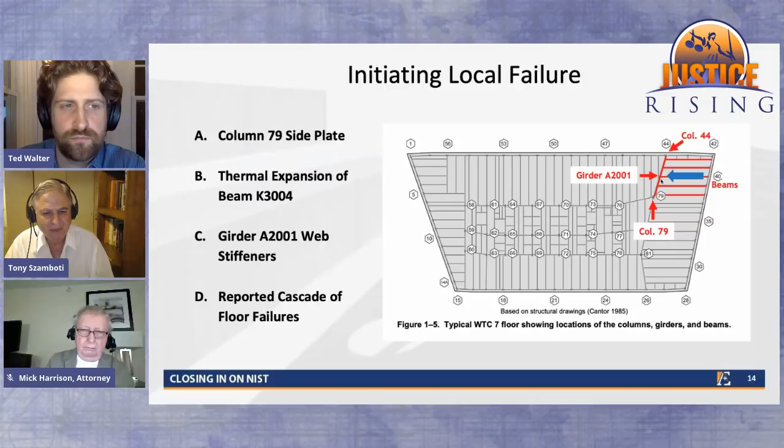So I guess we could move on from there, Ted, because we're going to explain. Okay. We're going to explain.

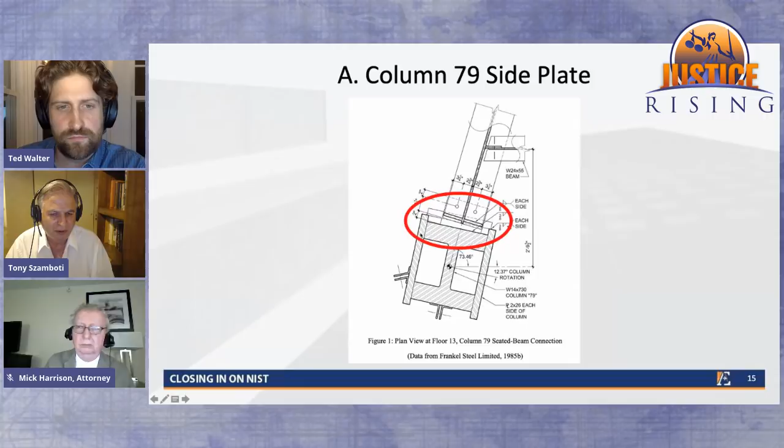This is a top view. You're seeing a section of column 79, with the hash marks, and you're looking at the top of the girder. And the column is interesting. It's what they call a built-up column. It's a very heavy I section, with 5-inch flanges on a 3-inch web, and then it has 2-inch thick by 26-inch side plates welded to it, so it's built up. And those side plates protrude, nominally, 1.79 inches past the face of the I section. So you see that protrusion there.

And the girder is oriented so that its western corner, that corner there, Ted, is only about 1/8 inch clear of the side plate to the left.

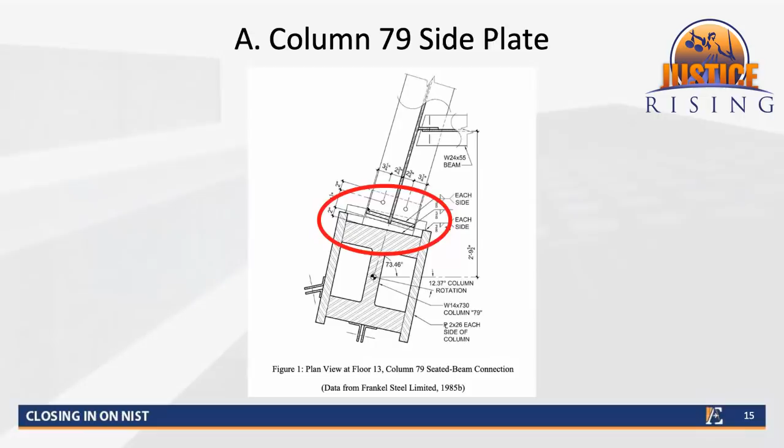Now, that's at room temperature. As soon as this thing heats up at just 200 degrees centigrade, it's a 45-foot long beam. It's going to expand about 1.25 inches. That's 5/8 of an inch. So that puts it 1/2 inch inside the side plate. You can see this sort of model, the side plates here.

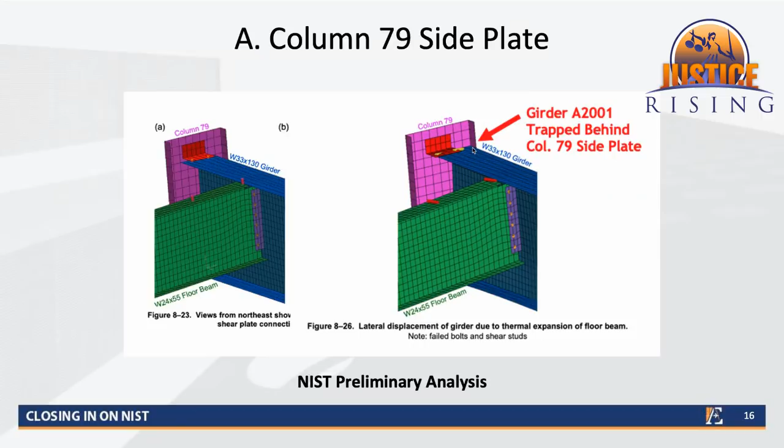And in their analysis, it actually got stuck in their preliminary analysis. You see it. They don't have it going past that side plate that you see on the upper left, on the right side view. In the left side view, it's at nominal. It hasn't expanded yet. In the right side view, it's expanded, and it's stuck behind that side plate. And that side plate is 2 inches thick, and it's welded along the whole column. There's not a chance that the beam would buckle before that side plate ever ripped off of that column. So they don't address this, even though they show a figure like that.

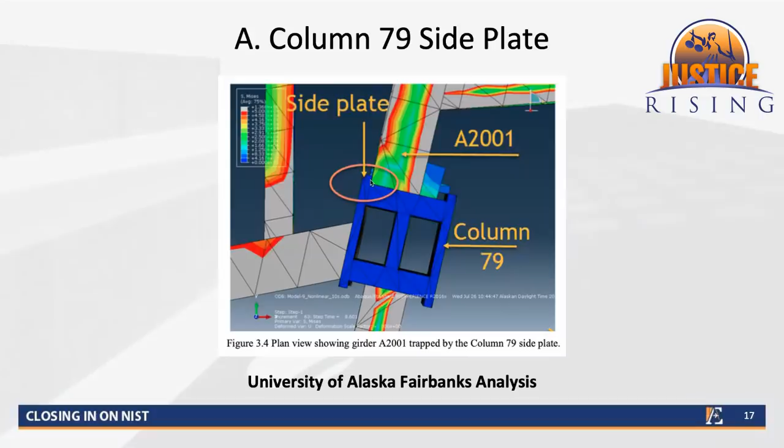And this is what the University of Alaska at Fairbanks did in their analysis. They show here that the girder certainly, it's heated. This is a stress analysis with heating the beams in the girder, and the column stays a lot cooler. And anyway, you see the girder gets trapped. It goes up against the flange, the face of the column, and it gets caught behind that side plate. That's exactly what would happen. So there's not a chance that that girder could be pushed off its seat.

And what this says here is, I'm going to just read the highlighted part. The full-scale model had detailed connection models that are consistent with the fabrication shop drawings as shown in figures 8.21 and 11.15 of the World Trade Center 7 report. The girder A2001 to column 79 connection locates the bolts on a seated connection attached to the exterior edges of the column 79 side plates. with the girder axis at a slight angle to column 79.

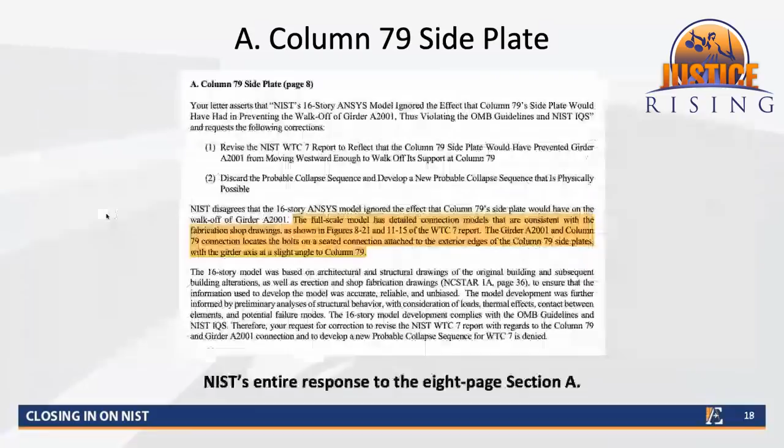They're just telling you what the connection is. They're not giving any answer to the question on why they did not see that the girder would be stopped by the side plate, and when it's obvious in their figure.

So on the left is NIST figure 8.21, and you can see the side plates don't protrude very much. In the left-hand figure, the right side of that, you see a top-down view. And I showed you a realistic to-scale drawing at first, and they stick out 2 inches. They're 26-inch long side plates. It looks here like they have it sticking out a 1/2 inch, and they have the girder sitting back a significantly greater distance, at least when you just view it scale-wise, than the actual distance the girder is from the column itself.

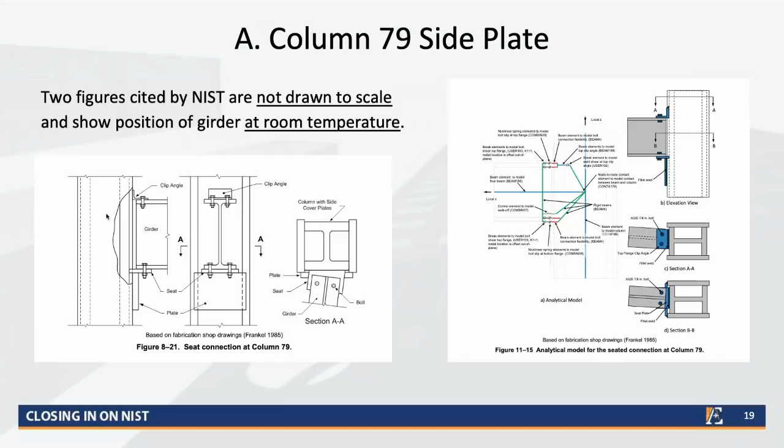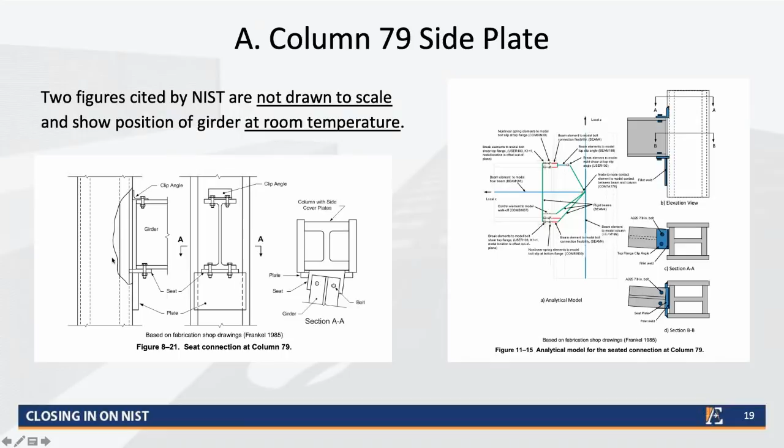So Ted, on the right side, I don't know what exactly that was there, but it's similar. It's similar. I think it's showing it more from a plan view. It's also showing it from a plan view, and what that's showing is the top and bottom clips. Top and bottom, yeah. The bottom bolts in the top clip.

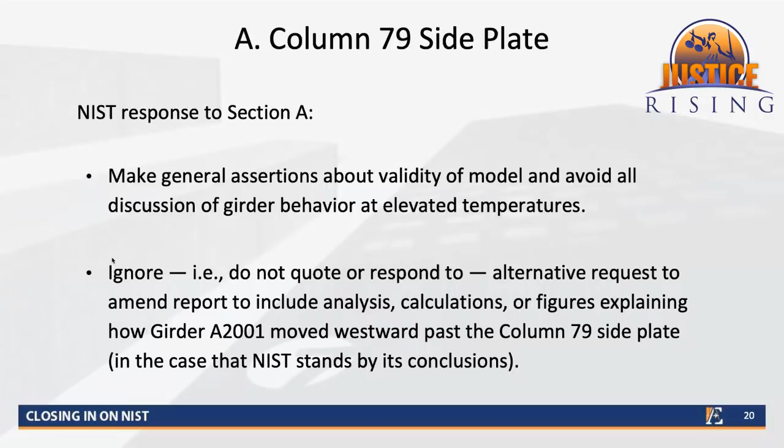Yeah. So section A of the request for correction was about the side plate issue, and we're saying that all this is doing is making general assertions about the validity of their model, and they don't discuss the behavior of the girder at elevated temperatures. It's going to expand. They said it was at 500 degrees. And bear in mind that there's proof that girder had to get hot.

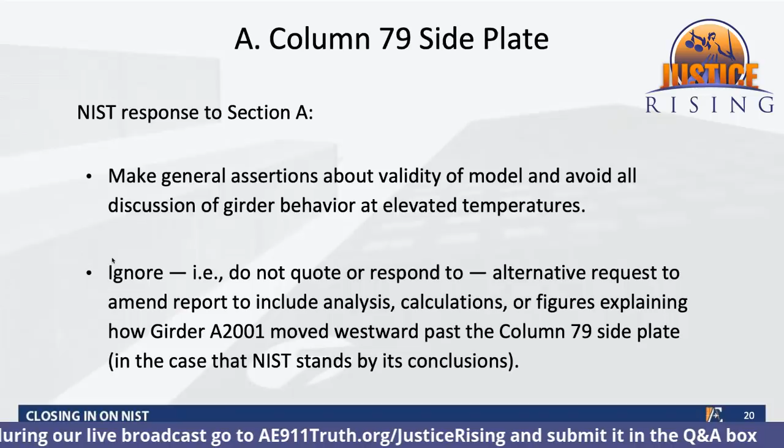You can't have beams which are connected to the girder and in very close proximity to it getting hot, so they expand and push the girder without the girder getting hot. It's right next to it. You can see they're connected. So if the beams get hot, the girder's got to get hot. If the girder gets hot, it's going to push itself towards the columns, and it's going to be up against the flange of the column at 500 degrees. And it can't get around that 2-inch side protrusion of the side plate.

One thing I want to highlight, which is kind of stated in the second bullet point there, Tony, is that throughout the request, what we also said was, okay, if you maintain your findings, if you maintain your position, then you need to include more information, analysis, calculations, or figures that are actually explaining how the girder could move past the side plate. Because in their preliminary analysis, as we showed, the girder gets trapped behind the side plate, but in the larger scale analysis, somehow the girder moves past the side plate. Well, they don't even talk about it. No, exactly.

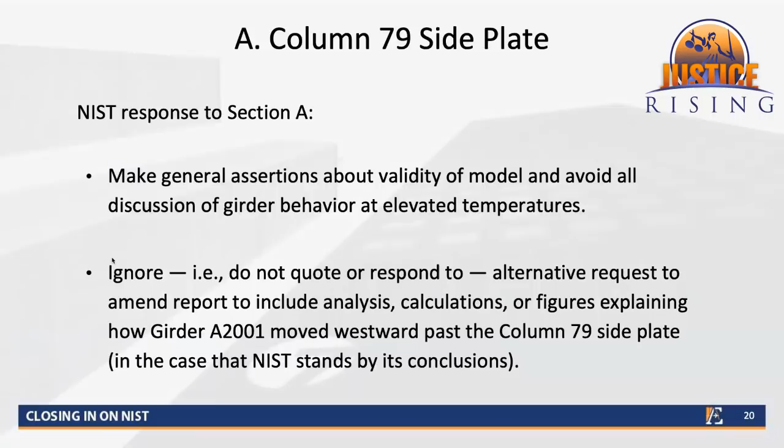They don't talk about it. They just assert that it happened, and it's like saying something wasn't there that was certainly there. Yeah. So the backup request in each of these points is to provide more information if they stand by their position, which they just completely ignored that aspect of the request. Justification for their position, right? Yeah, and they're not amending the report to include more information, which they would need to comply with the.

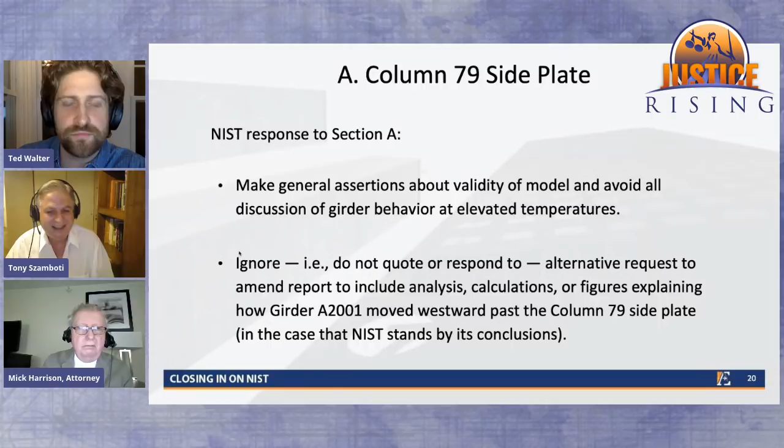It's not even more. They never gave a justification for it to begin with. So we're asking for it, and they're not providing it. And then, unfortunately, you have to come to the conclusion that they can't. Okay, this is solid engineering. This is not spin.

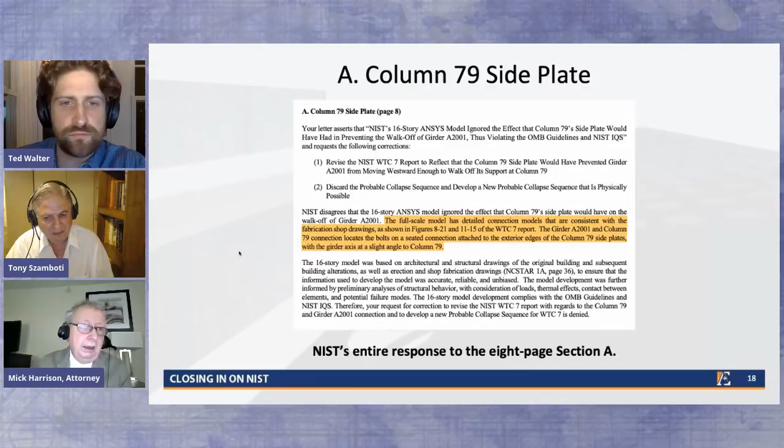So, Tony and Ted, could I insert myself just for a minute? Looking at this from a lawyer's point of view, and I know there are more examples you have to give of this, but the law may defer, and judges may defer to some extent, to agency expertise in a lawsuit if the agency exercises its professional judgment and its discretion and offers a detailed opinion and a basis for it. What we have here, though, is the agency failing to even offer a response to rebut your technical points. And so here there's nothing substantive in terms of an agency technical opinion for the court to defer to. So I just want to point that out.

Unfortunately, we're being given, and I don't even like to say this, we're being given garbage. They have no basis. There is no chance it can get past that side plate. That girder has to get hot. If those beams are hot, it's going to go against the column. It's going to run up against that 2-inch protrusion of the side plate, and it's not going to be able to go any more than 3 inches. Yep. And let's talk about a few of the other points.

Right. Now, in addition, there's other things. The side plate is just the first of several reasons this can't possibly happen. So there's multiple avenues, multiple obstacles to what they're trying to say. And by the way, the loss of lateral support has to happen for any of the columns to buckle. This has the most potential out of any connection in that building, and this can't happen. So if this can't happen, none of those connections could have failed and caused the columns to buckle. So there's serious problems with the whole natural collapse scenario.

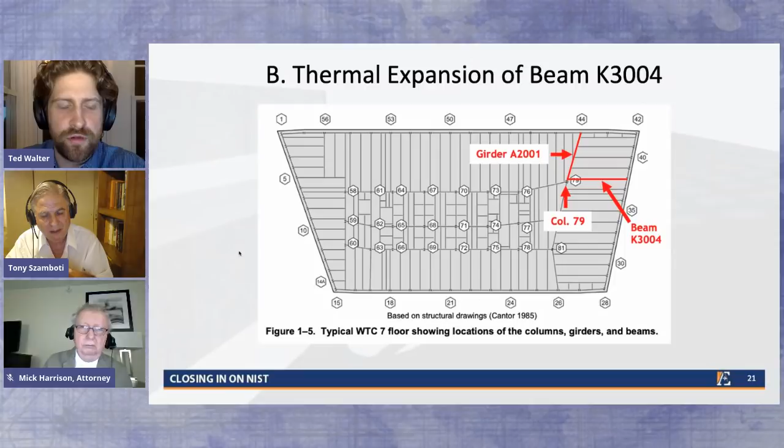Tony, do you want to talk about beam K3004? Right. And you're going to have to move past this, Ted. Beam 3004. No, don't yet. Just let me look at that other. Beam 3004 is going to control this because, as I said earlier, girder A2001 is between the flanges of column 44, so it can only rotate there, up at column 44, Ted, on the north. It's between the flanges of it, so it can't be pushed laterally, except to go against the flange, and then it has stopped, and it can rotate.

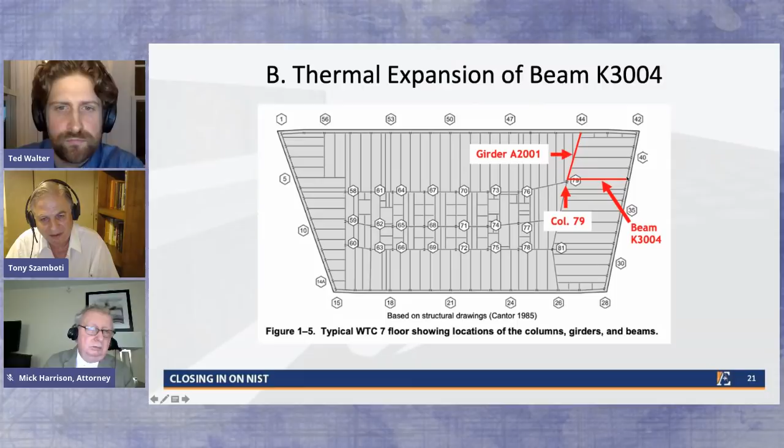So those 5 beams there that are pushing on the girder would want to rotate it, but beam K3004 is a limiting factor. It's 52 feet long, and at 600 degrees or so, it's going to expand around 5.5 inches, actually a little bit under that, in that expansion. So you can go to the next slide, Ted.

So in the NIST report, they said a girder was considered to have lost vertical support when its web was no longer supported by the bearing seat. The bearing seat at column 79, that's the seat that the girder sat on, was 11 inches wide. Thus, when the girder end at column 79 had been pushed laterally at least 5.5 inches, and bear in mind, that's about the maximum that beam could expand, it was no longer supported by the bearing seat.

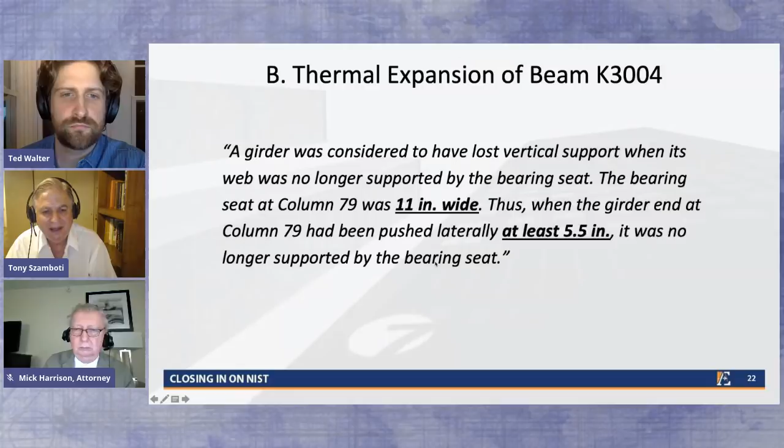However, when the drawings were released, 3.5 years after the final NIST report, which came out in late November of 2008, in early 2012, an engineer by the name of Ron Brookman got them to release a large number of the drawings. And it was noticed in an assembly drawing showing column 79 and girder A2001 and its seated connection, that the seat was 12 inches wide. Well, that makes a big difference because 5.5 inches isn't going to get the web of the girder past the edge of the seat.

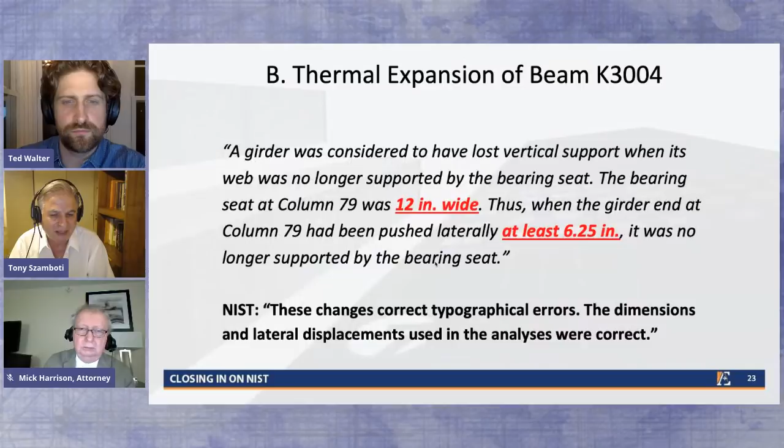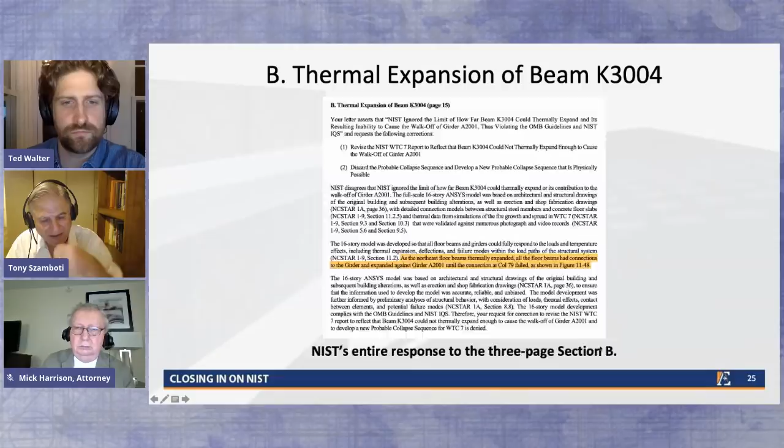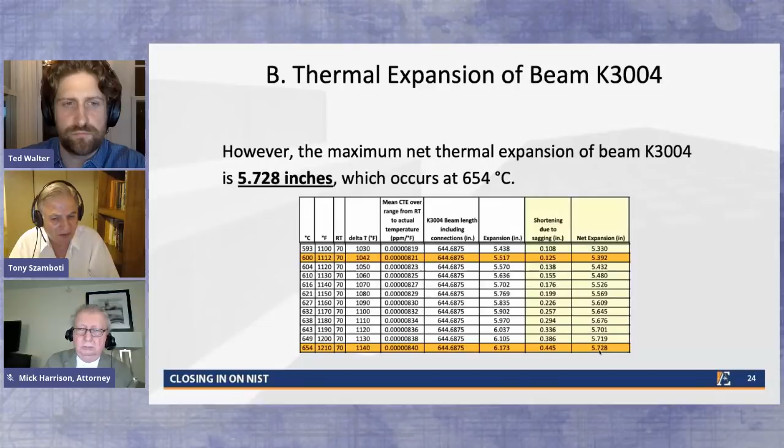And the reason that's significant is that's the maximum, because after that, the shortening due to sagging overtakes the expansion. And at any temperature higher than that, it actually gets shorter. The net expansion is less. So they can never get there with these beams expanding. They can never push that girder off its seat that way. But they still want to maintain that it happened, and they never determined how they could get any more than that 5.5 inches they initially said.

And it's very suspicious. They said the seat was 11 inches wide when it was actually 12. The drawing shows it is 12. Why would you put 11 inches in the report? I think it's self-explanatory, because they could only get 5.5 inches of expansion. Okay, so that's the thermal expansion of beam K3004. And they avoid giving a specific value for the expansion. Why don't you explain their response here?

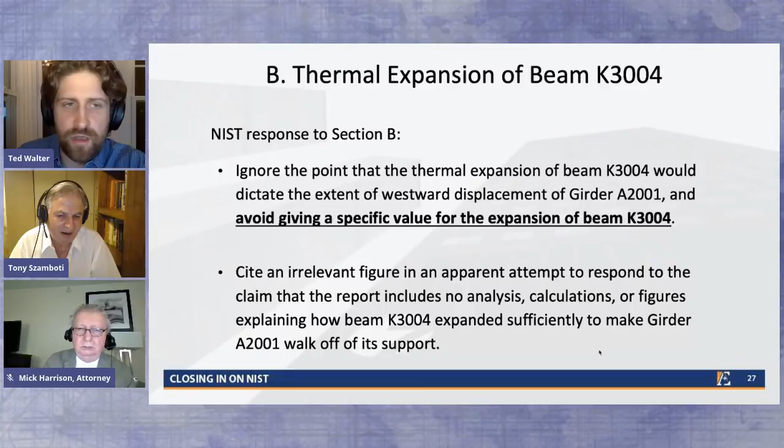Yeah, the gist of it is that they avoid actually giving a value for how far that beam expanded or could expand. They simply don't address any of the analysis in the request. Well, we've done that for them, and they can't, and they don't confirm or deny. They don't try to refute any of it, and it's absolutely true, correct. Right, so I think this one takes the prize, but go for it, Tony.

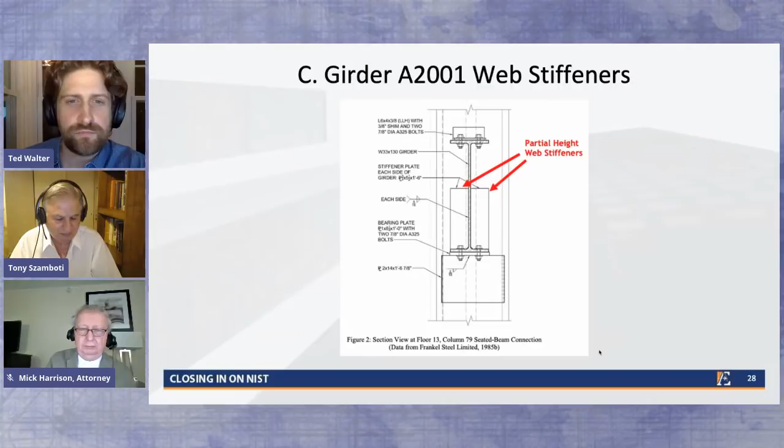Right. So in addition to the fact that the seat was too wide and the beam couldn't expand enough, and it would be stuck behind the side plate to begin with and can never get there, the girder also had web stiffeners on it, partial height web stiffeners they call them. They're half the height of the web. Now, these are critical, and this shows a solid model. Let me just explain this.

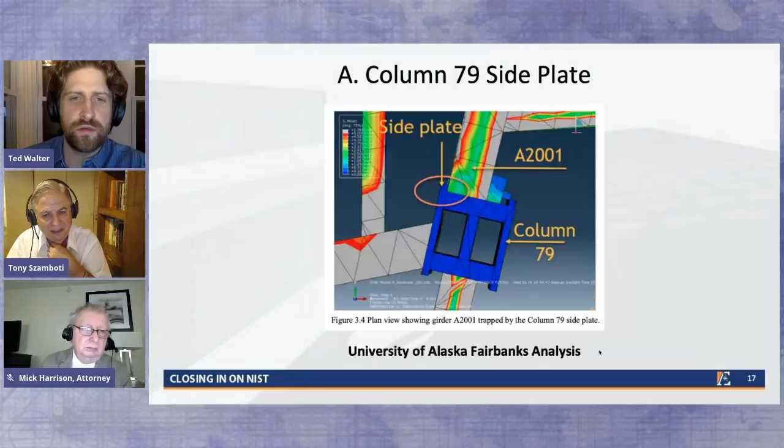And this is the University of Alaska analysis. Keep going. What they're saying is this was pushed off, and they left these stiffeners off. Ted, I want to see the NIST view showing the stiffeners aren't there. That's one, and then figure 821 I'd like to see too. I want to show the people that the stiffeners aren't there in this view. Yeah, I'm going to have to go back for that one sec. Did I pass it? No, I think there we go.

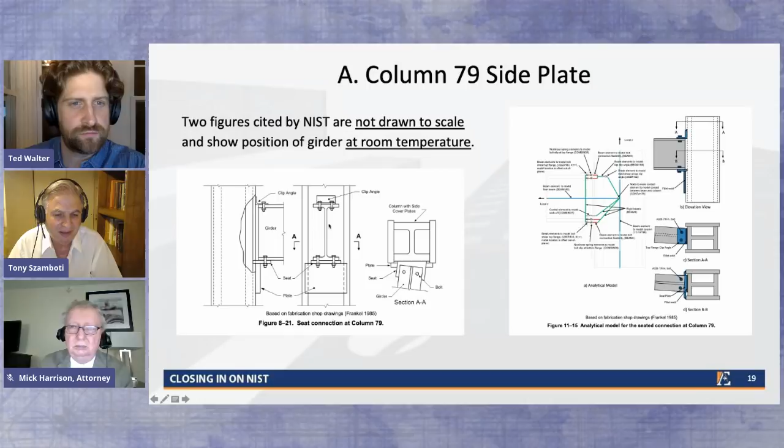There we go. Okay, on the left, that's figure 8-21 from the NIST report. You can see there's no stiffeners there. They didn't use them in the model. Now, occasionally engineers leave things out that aren't germane to the analysis. These are very germane because they would stiffen that flange by 80 times. It's 80 times stronger. Anybody that ever took a 12-inch ruler in grade school and tried to bend it when it was flat, it's fairly easy, like a diving board.

Turn it 90 degrees and try to bend it where it's like 1 inch or 1.25 inches deep. Even though it's thinner, you can't bend it. And that's what stiffness does. That's what depth, what the web in a beam does. The deeper that web, the harder it is to bend. It gives it much more bending resistance. Well, those stiffeners, if you can go back to the solid model, Ted.

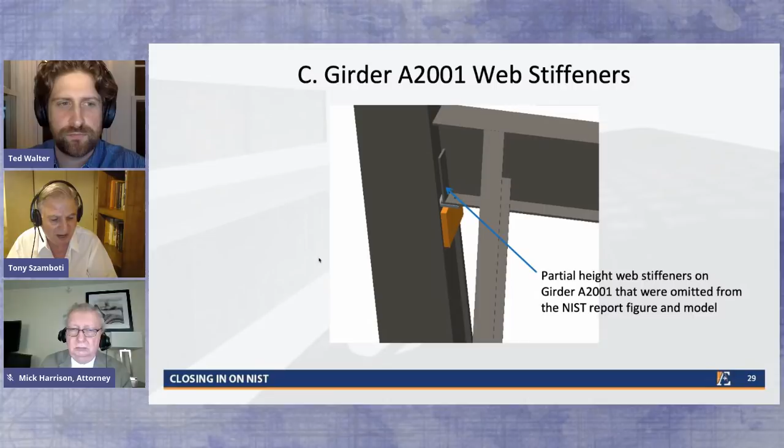No, you got to go. There you go. Those stiffeners make that flange 80 times stronger in bending. And NIST said, without the stiffeners, it failed. It was 2 times too weak. All right, so with the stiffeners, it would be 40 times stronger than it needed to be.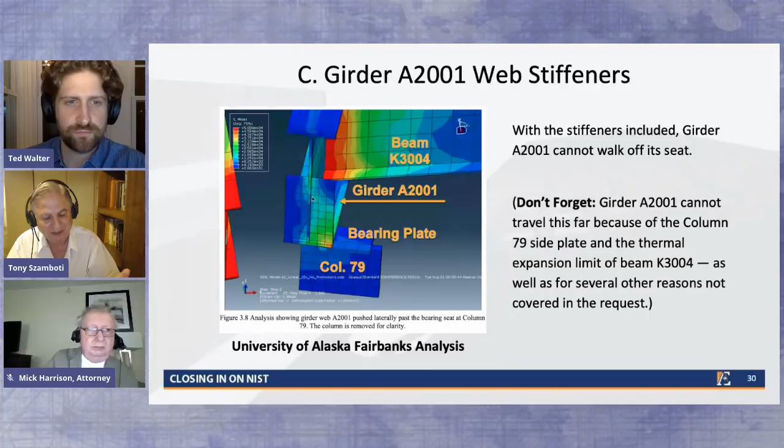Yeah, and the idea is that this thing would just kind of continue to fold leftwards if there were no stiffeners there. It would just kind of bend over and fold and cripple. The flange would have curled up. It would have bent up, and the girder would have fallen. But because of these 18-inch high stiffeners, that could not possibly happen. So this is just another thing that could not happen. There's multiples of things that can't happen, like we've already shown.

And we should be very clear about what NIST's reason is for leaving out those, because they acknowledge they leave out the stiffeners, and the reason is they've admitted it. Preposterous. It is preposterous. The reasoning is that they're for web crippling, but there was no web crippling, so they left them off, and that the web didn't cripple in the preliminary analysis.

That's sort of like, I was trying to think of an analogy, and I think this works. It would be like testing the wheels of your car in your driveway by taking the lug nuts off and seeing if the wheels would fall off. Well, of course they wouldn't if the car's static and you have a balanced load. But then leave them off when you go driving and see if those wheels don't come off. And that's sort of what they did. It's in that direction. Okay.

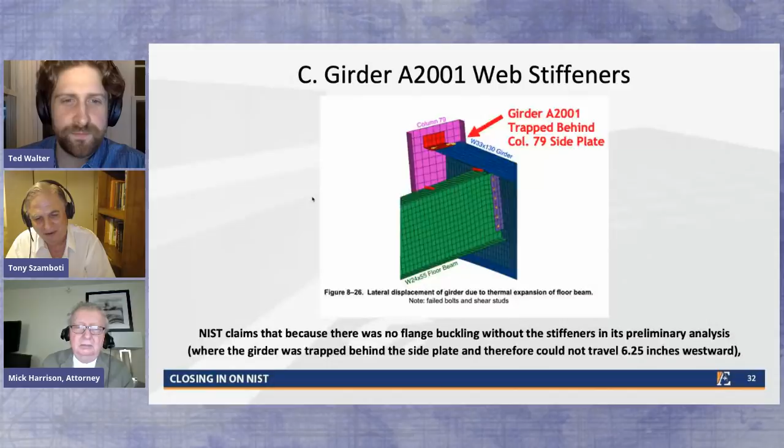Well, and also what's also crazy is that the reason that it didn't have the opportunity to fail is because the girder was trapped on the side plate, which goes back to issue number 1. It's a convoluted thing. Issue number 1 was stuck behind, and that's why the things are in the order they are here. And then we go in stages. If somehow it got past the side plate, which it couldn't, it can't be moved far enough by the beam. Even if it could be moved far enough by the beam, the stiffeners would stop the flange from curling up, and the assembly wouldn't come down because it would still be strong enough to stay on its seat.

So here's 3 things. It's a whole series that show it can't happen, it can't happen, it can't happen. And when you get that kind of argument, it's a real argument. And all they're doing in opposition to that argument is say, no, we don't agree. We don't agree. Well, it's silly on its face. Unfortunately, we're dealing with something that's silly on its face. And it's just bureaucratic inertia that's stopping this.

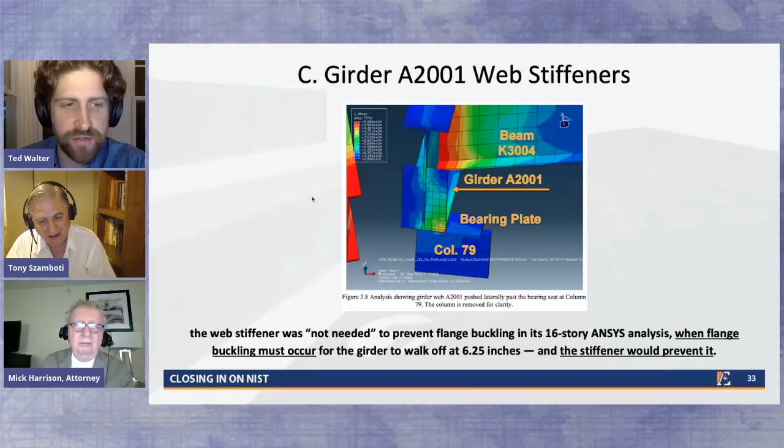Yeah. And I want to read what's at the bottom of this to make it as clear as possible. The web stiffener was not needed to prevent flange buckling in the 16-story ANSYS analysis. That's the larger scale analysis. When the flange buckling must occur for the girder to walk off when it's pushed 6.25 inches. So they're saying that the structural feature was not needed to prevent the failure that actually occurs. Happened. That they actually say happened. Right. And we know from the UAF analysis and from basic engineering analysis that the stiffener would prevent the buckling. Right. So we're just highlighting there what their response was.

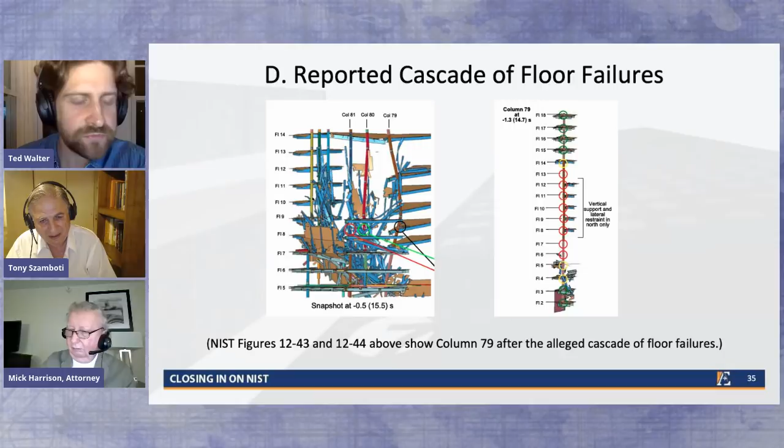Tony, I think we should move on from this one. This one's very complicated. And we can just say something about it. You can't break through the next floor down. And you can do an analysis, and that's in the UAF report. And this shows you can do a natural frequency analysis, which was done, and you can determine the spring stiffness of that assembly and how much it would deflect and what the impact load would be.

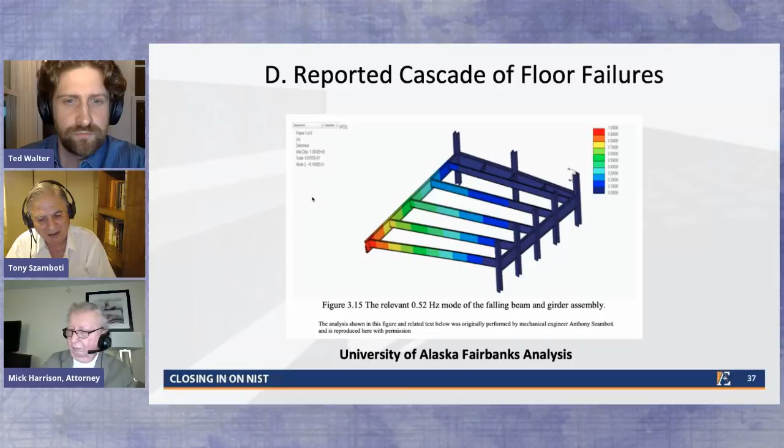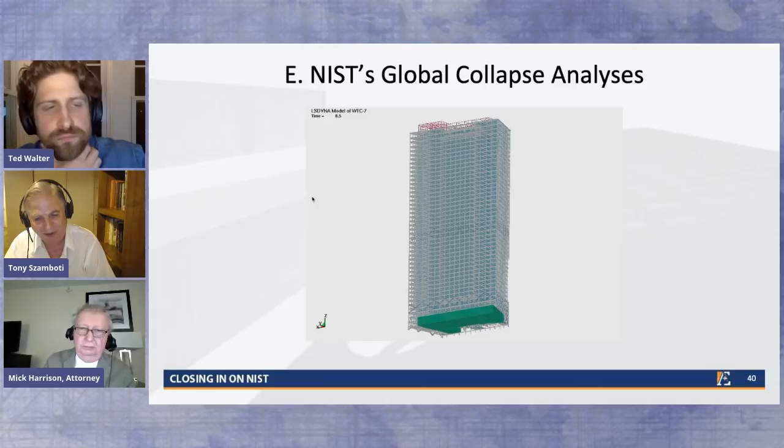And the impact load is about 10% of what's needed to break through the next floor down. So even that can't happen. So all four of these situations can't happen, and one piggybacks on top of another, on top of another, on top of another. They can't get there. It's like having multiple doors to get through that are just not going to let you. They're trying to get a much bigger thing through a much smaller hole, and it's impossible.

Yeah. I'm going to take like 2 minutes to talk about the global collapse analyses and NIST's response to that. So the global collapse analysis is where NIST talks about once this initiating failure occurred, you had a chain reaction of other structural failures. Column 79, which is that key column we were talking about, buckles, and then the adjacent columns buckle, and the penthouse starts to come down. And so this is their global collapse analysis showing that happening.

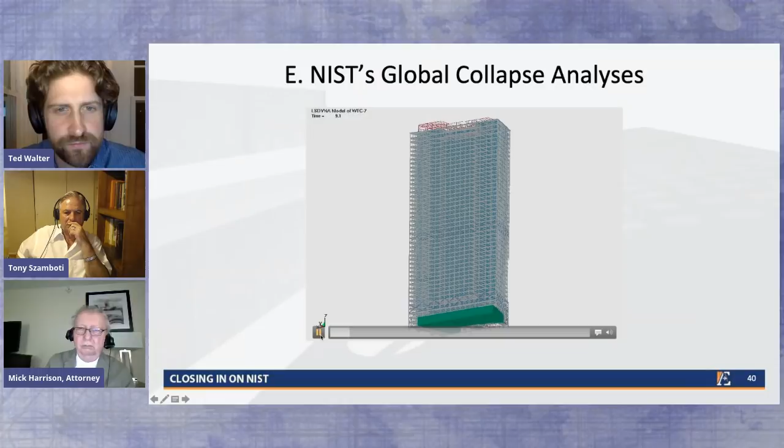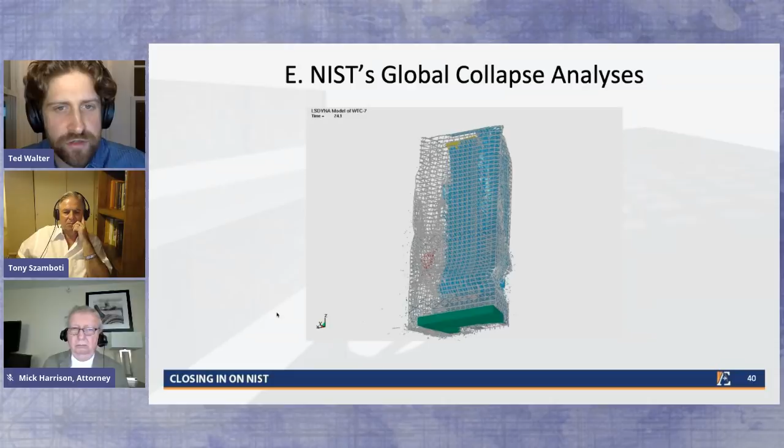And then it ends right there. And so as you can start to see, by this point, which is not actually very far in terms of time into the collapse, the building is severely deformed. And we'll get a little bit more into that now in these coming slides.

NIST's claim here is that the global collapse analyses match the observed behavior reasonably well. The global collapse analysis confirmed the leading collapse hypothesis. So they use this global collapse analysis to say our hypothesis is correct. The animation looks like the real thing, when in fact it doesn't whatsoever. And so that's the claim that we make in section E of the request.

Contrary to NIST's assertion, NIST's global collapse analyses do not match the observed behavior reasonably well and do not confirm NIST's leading collapse hypothesis. What we're making the case is that their model fails to match most of the observed behavior, and that it predicts fundamentally different structural behavior from what you actually see in the video. So in the video, you have an almost total lack of deformation. You have very strong symmetry, and you have free fall, as well as a sudden transition to free fall.

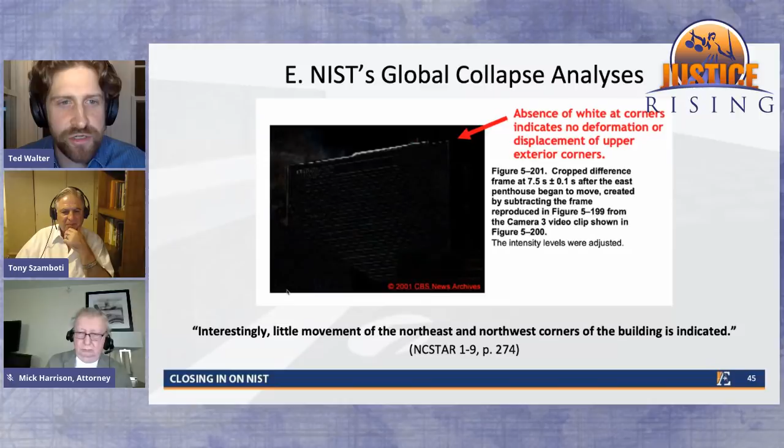And NIST actually says in their FAQs, and they repeated it in their response to the request, only in the later stages of the animation after the initiation of global collapse do the upper exterior wall deformations from the NIST analysis differ from the video images. Well, this is at the moment of global collapse initiation. That's at the beginning. So it's a flat out false statement, and they repeated it in the response to the request.

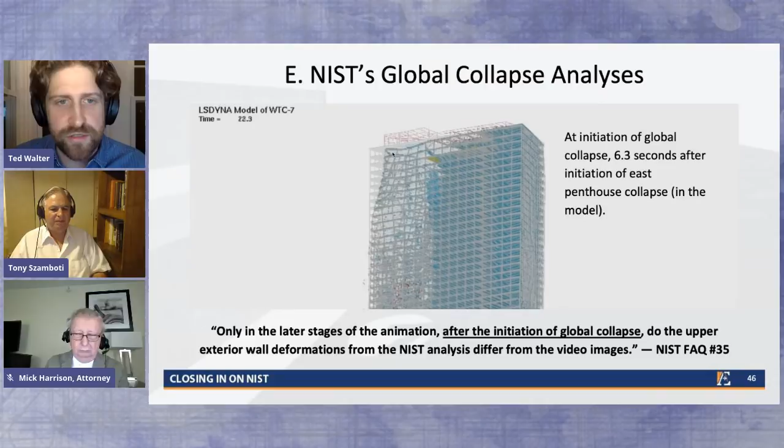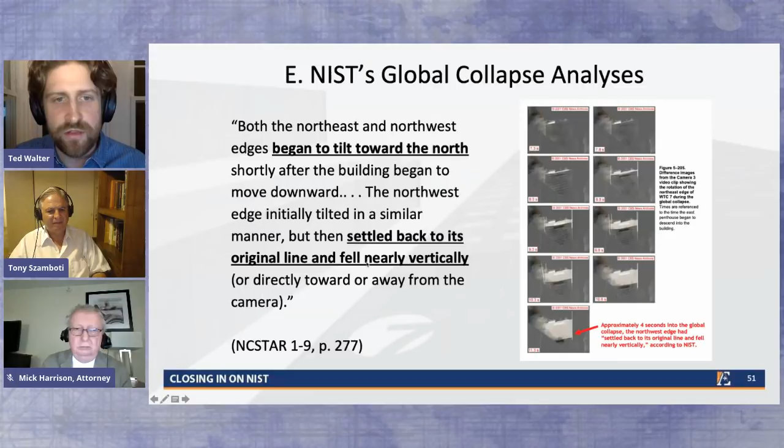I'm going to move along a little bit. There's also the directionality. Here we demonstrate that in the NIST model, it's actually tipping. It's tipping to the south, whereas in NIST's own words, part of it began to tilt to the north, and it comes down nearly vertically. The western corner, it comes down nearly vertically. Well, we don't see that here. It's tipping to the south. And just showing that again, on the left, we have where it is at 8.3 seconds, roughly. That's roughly where it is here.

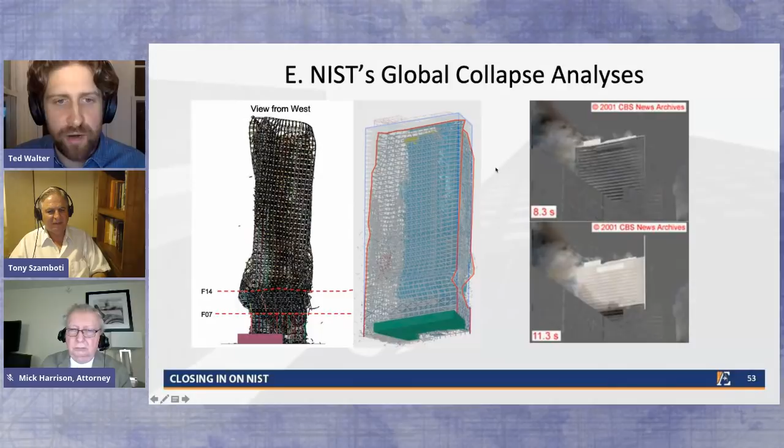This is 3 seconds later, and the building is still symmetrical. Imagine if you allowed what's going on in this model to continue for 4 more seconds. The building would probably be halfway to the ground, but having tipped over. And that's why they cut off their model at that point, because it's tipping. Right. Well, in real life, it did ultimately tip a little bit, but I mean, halfway down by that point.

Yeah. Unfortunately, there's so much detail here that we're not going to be able to get through. But we can maybe post these slides so that people can have a look at them and learn more, and it's sort of a guide to understanding what is so horribly wrong with this.

Well, you can also say they admitted to free fall. They were forced to admit to the free fall because it was publicly measurable by David Chandler, but they didn't address the implications of it. You can't have free fall and be deforming, providing energy for any other purpose. All of the energy has to be becoming kinetic. So if you're deforming things in a crushing action, you can't be in free fall. Free fall means nothing is opposing. So something's wrong with saying it's deforming things to collapse the building.

Yeah, real briefly, NIST tries to paint the picture that it took some time to build up to free fall. There was this 1.75 second stage 1 where the building was at slow descent, and this is their depiction of that. When you actually measure different points across the building at the corners and in the middle, you see that there was no movement of the corners, which is what was shown in NIST's own figure here. And then there's a little bit of movement of the middle of the building. And then simultaneously, all 3 points go into free fall at the exact same moment. So it really is a sudden transition to free fall, which makes it harder for NIST to claim that their model somehow matches the actual behavior.

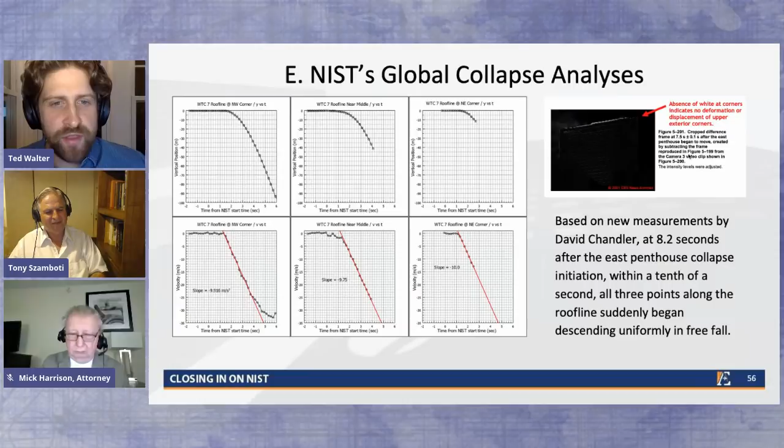Well, what they do is they arbitrarily start the collapse earlier to try to show it had that 1.75 seconds, but in reality it wasn't collapsing for most of that 1.75 seconds. No, and David Chandler measured it. I think these are the best measurements we have to date that show there was a little bit of movement in the middle, no movement at the corners, and then it all goes into free fall at the same time. Right. Across the entire building.

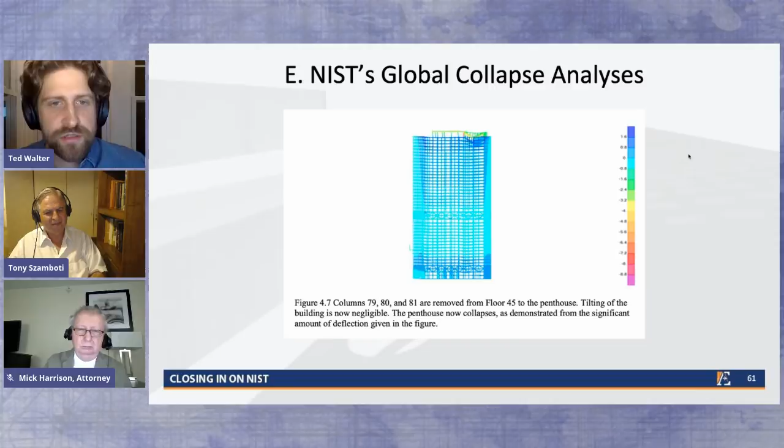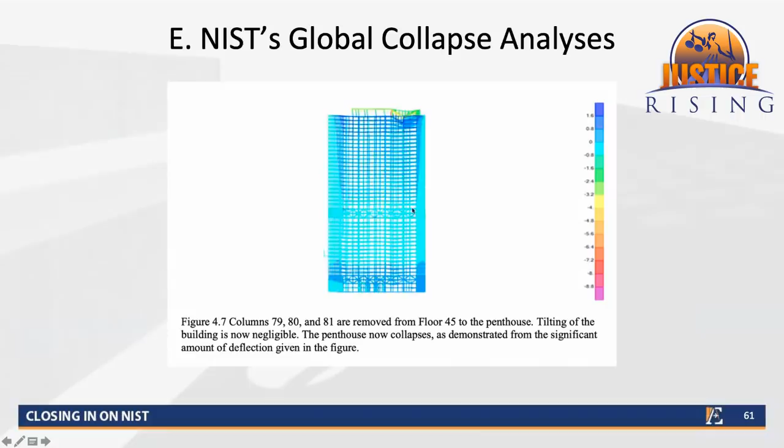Right. So the big question is, and there might be an obvious answer for a lot of folks, how can the lack of deformation, the symmetry, and the sudden transition to actual free fall be achieved? That's what the UAF analysis shows us. You can get the east penthouse to fall without any deformation of the rest of the building if the columns below the east penthouse are failed high up in the building, without deforming and causing the rest of the building to tilt. Right. Or minimally. The columns were largely intact for most of their height.

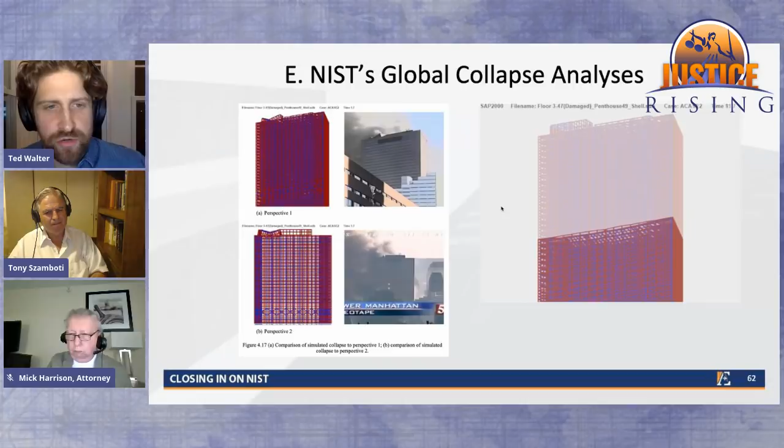Yeah. And this is the global collapse analysis in the UAF study, which shows, again, the symmetry, the free fall, etc. I think that's really, unfortunately, all we have time to cover. There's 3 other points, but I'm gonna skip ahead. We will make this available so people can review it.

One thing just to highlight here in the last point, though: NIST's response to the central claim of Section H. This is the last section of the request. Despite the discovery of severe erosion in several beams from the World Trade Center, NIST neglected to perform tests to determine the cause of the erosion in one such beam recovered from WTC 7, and then falsely stated that no identifiable steel was recovered from WTC 7. NIST's response is basically to say we cannot confirm with 100% certainty that beam was from Building 7.

Now, all of the professors, researchers who studied this beam, everyone who has studied this believes that the beam came from Building 7. There's a lot of documentation to suggest that. And so this is one point, along with the earlier points, where we expect to be hitting this very hard in the appeal. I'll just say one thing real quick. It could be the type of steel that was used in Building 7 as opposed to the towers, and the shape. The shape of that beam may not have been anything they used in the towers, and that's why people knew it was from World Trade Center 7.